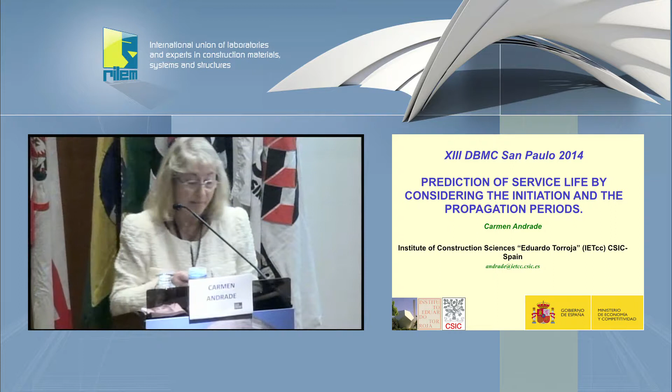My presentation tries to answer some of the questions on Vanderlei, about the prediction of the service life, which is now very popular, and I have introduced initiation and propagation periods.

The content: I will try to make a short analysis of the new trends that are included in the model code, the FIB model code.

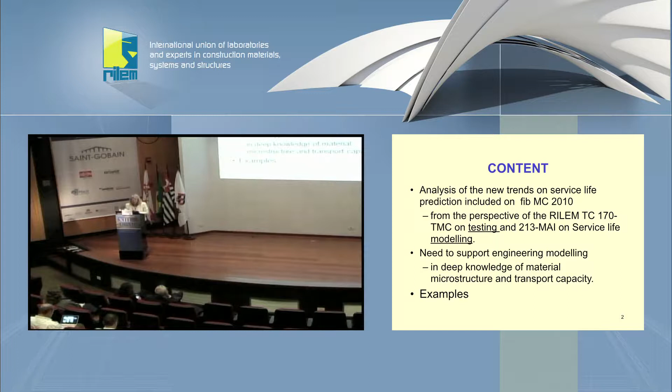This Congress also traditionally has commissions and committees of FIB participating. We now have this model code with a probabilistic design of the service life, but I would like to analyze it from the perspective of my work on the two RILEM committees that were dealing with this subject of service life, and some of the members here will recognize part of our discussions in these two RILEM committees.

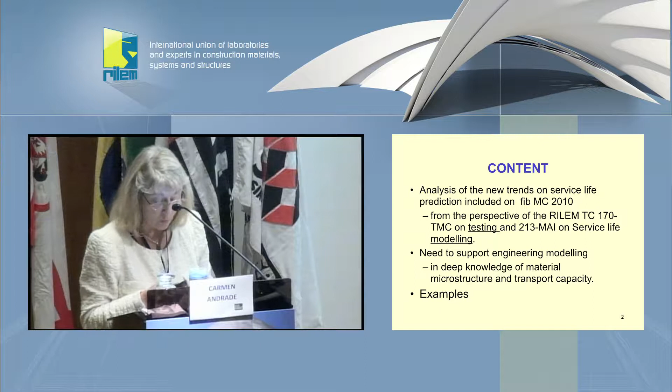The service life engineering modeling needs the support of deep knowledge of material microstructure and transport capacity, due to the lack of calibration we have, or the long-term record we have on the service life. I will try to illustrate this shortly with some examples.

The background, and I would like to recognize the discussions in these committees that I am now showing here. I mentioned already the TC on testing and modeling chloride transport into concrete, where we studied the influencing parameters on the service life prediction, and also the other where we broadened the scope, commenting on all kinds of models like multi-scale modeling or numerical models.

Also the DuraCrete project, which has been an inspiration for the model code in the part of durability, because in that project, of which I was a member, we tried to develop the framework for the reliability concepts to be introduced into durability.

But I would like to emphasize, since it's sometimes used very enthusiastically, that the examples there are fictitious, some of the numbers are invented and were tuned just to illustrate. It has an academic purpose, but some of the data are simply taken for the sake of illustration, and in that case cannot be taken as the good answer.

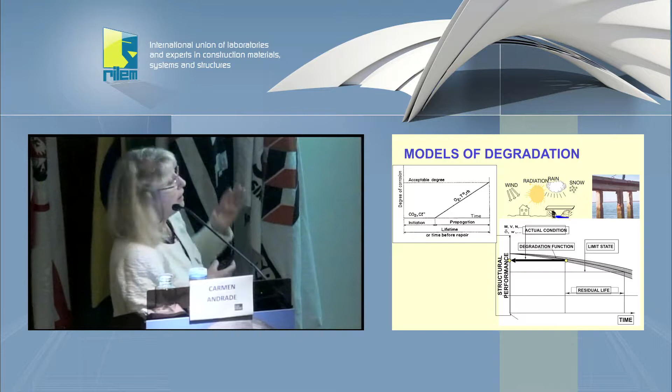Finally, more recently I am a member of Commission 5 of FIB on durability. They produced Bulletin 34, which introduced the models of DuraCrete but without enough calibration, and finally they ended up in the model code.

We have been talking in the first days about degradation functions, damage functions. Christer Sjöström the first day, and yesterday the other speakers, were illustrating well the importance of this degradation function in the total framework of the service life prediction. I have concentrated on this function.

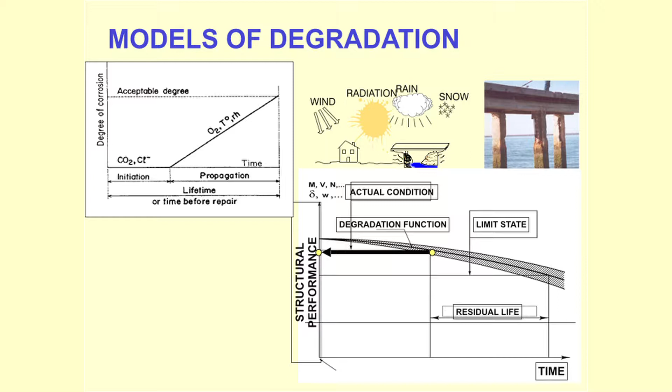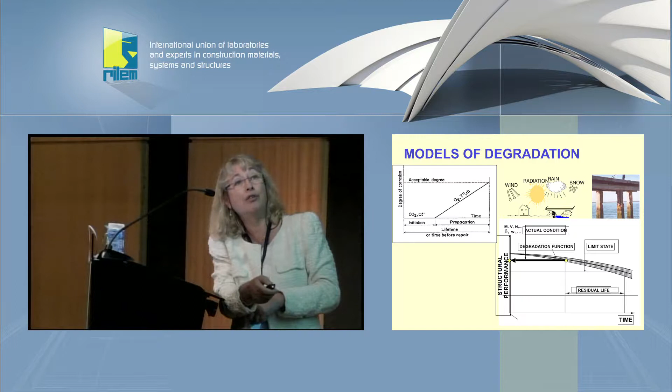They appear first in the model for the initiation or incubation of the damage, and after the degradation, the developing of the damage, we can put it in another manner as a degradation function, in which we need to define, for the sake of design, limit states in order to obtain a residual life.

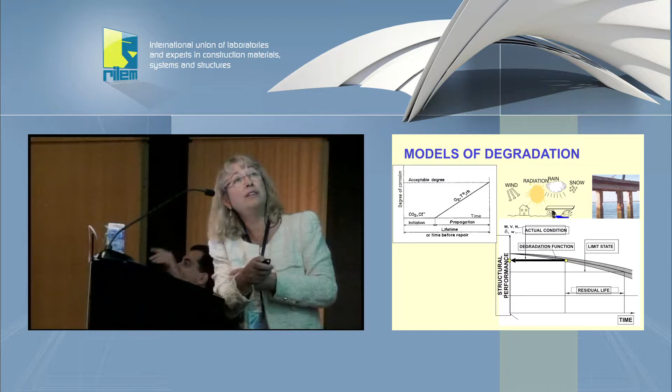What is important, as I will emphasize later and as has been illustrated by Alexander, is always the interaction with the ambient. In that case, we should have also models for the ambient, for the climate, which are now only concentrated in exposure classes.

The other aspect to take into account in this background presentation is that we are now in a trend to change standards to be performance-based, performance-based design. And we need to remember that concrete strength has been a performance property - you need to reach this.

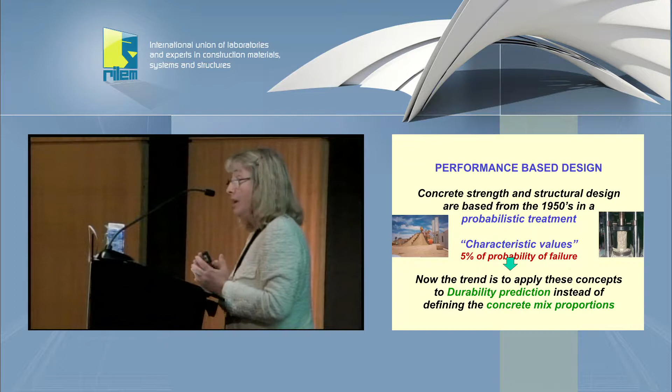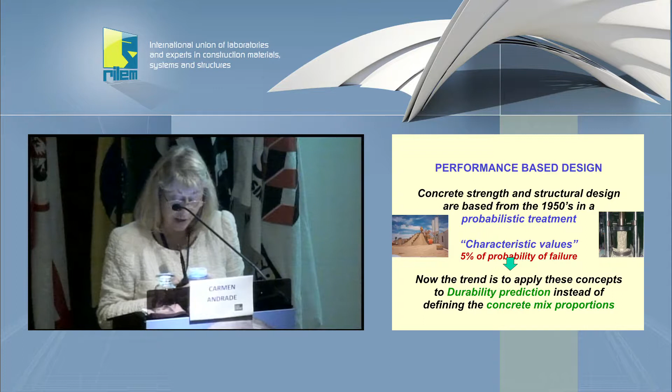In that case, we have a lot of experience, because it was introduced in the 50s, the idea to deal with this scattering of concrete strength by a probabilistic treatment. And we are talking in design about characteristic values. Now this trend is what is needed to be applied for durability prediction, and this has to be an alternative to design from concrete mix proportioning.

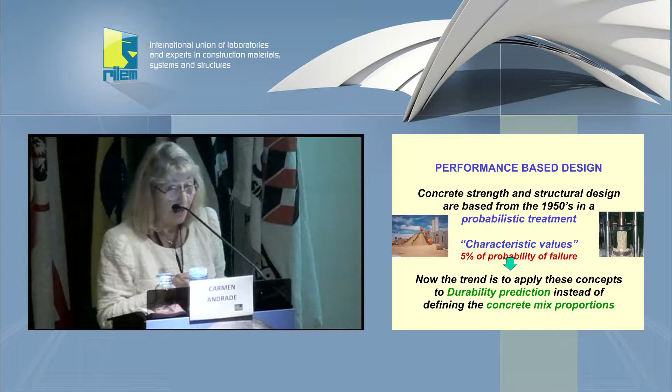But in this case, it's necessary not to forget the enormous experience and works that people working in strength and structural performance have made. And in fact, this was the driving force for the DuraCrete project.

Talking about or mentioning the model code, this is in FIB. I don't expect you to just read this, because I just copy and pasted it, but this is the scheme in the bulletin for durability design. And the most important aspect is the parallel alternative paths.

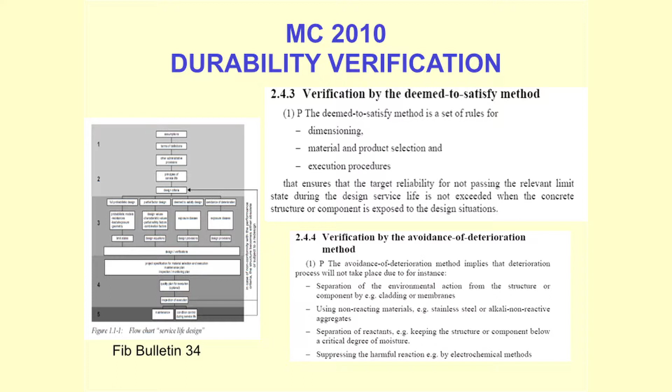They describe several alternative paths for verification, from the deemed-to-satisfy method to avoidance of deterioration, or the probabilistic treatment. Put another way, we have several possibilities for verifying durability in the future: several verification formats, the traditional one, the more modern one with service life, deterministic or probabilistic treatments, and also durability indicators.

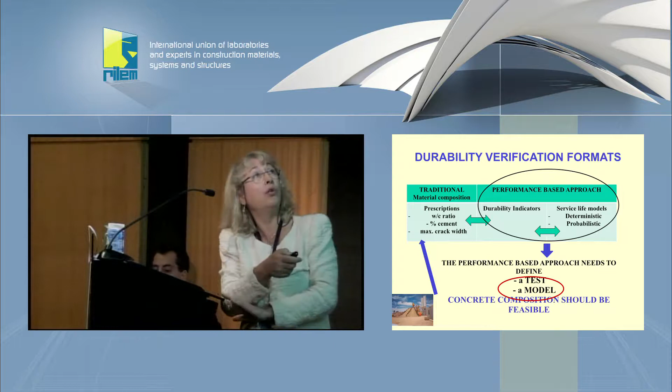I am not going to talk too much about that, but the most important thing is that they should give similar or equivalent results. We shouldn't go through one path having a completely different mix proportioning than another. Otherwise it's not correct - that's what I mean by calibration. We should be coherent and not allow too much difference. Of course, there are several types of concrete that can fulfill durability requirements, but they should be in the same range.

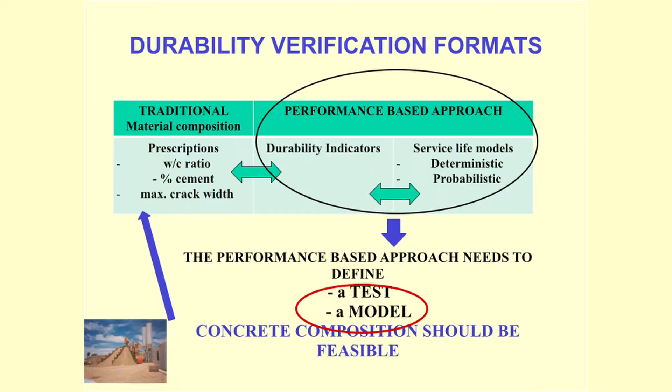And also, we always need a test to give the numbers for future performance, and a model in this case. And the concrete composition should be feasible.

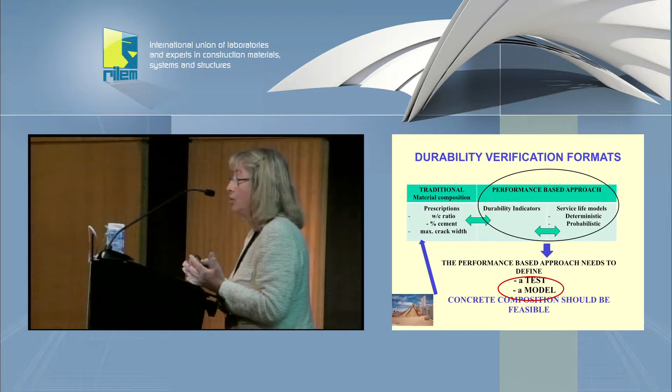I say feasible because I remember the Great Belt project, in which they were testing a lot of mixes that were really very sophisticated. And also, I will mention the Panama Canal, where they had to make about 60 mixes to find the optimum.

In that case, we should be aware of the cost of the durability performance. It's more costly, and somebody has to take that into account and consider it.

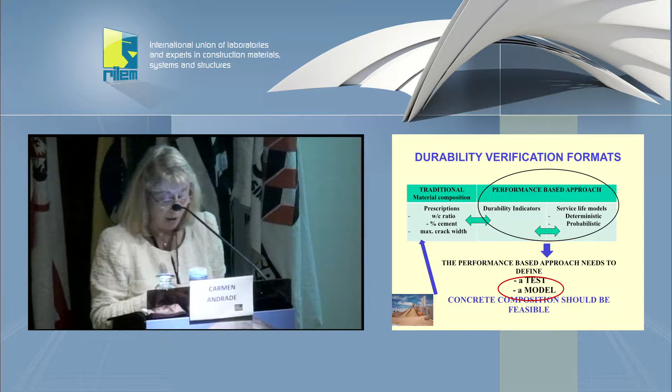About the model code - they are for the models.

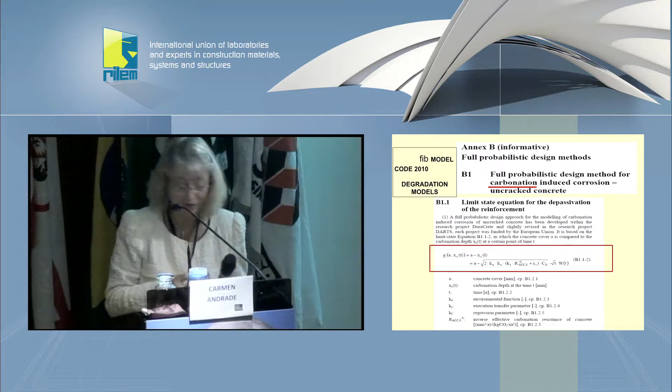In the model code, we have a degradation or damage function for carbonation. I will not illustrate this model in detail, only to say that it is too sophisticated, and this is one of the examples in which it shouldn't be taken strictly.

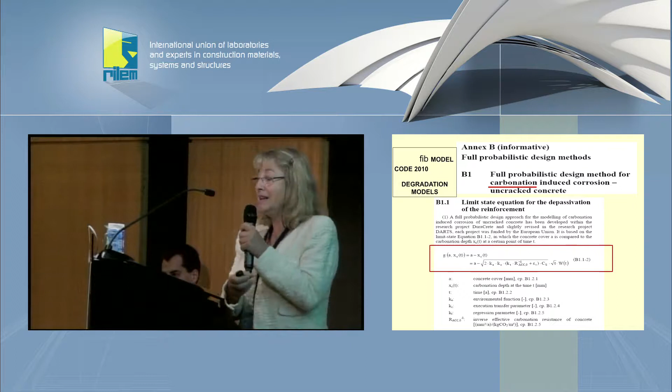The idea was conceptual when we developed this model - saying that the curing factor and the environmental factor should influence the performance, also the time of wetness - but when you try to give exact numbers, it's really complex to find the right ones. In that case, this should be taken as conceptual.

Even the term 'resistance to carbonation' was an idea during the project to be more psychologically close to the engineer by using the word resistance, but this is actually the inverse of the velocity of carbonation. In that case, it shouldn't be taken literally, each by each. It's only a conceptual model.

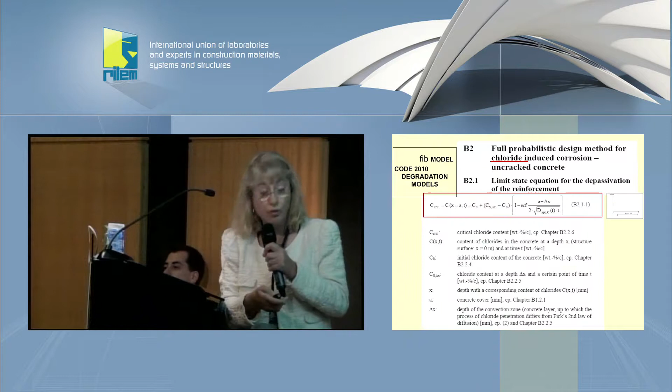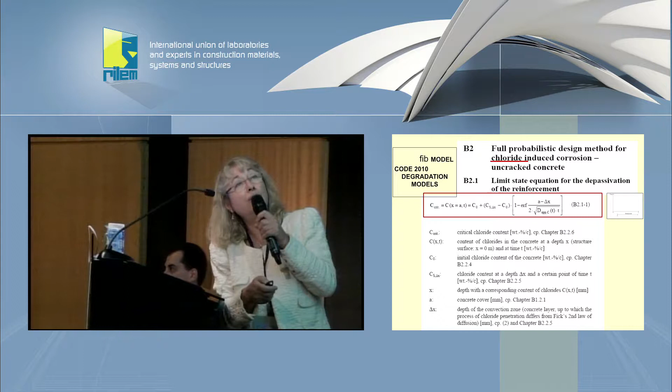Regarding chlorides, we took the error function from Fick's law. At that time we were also members of the RILEM TC, discussing the influence of the factors, and here we introduced the convection zone in order to account for the maximum when the profile has a maximum - the other parts are the same. Also, there is an aging factor not shown in this equation, and also the influence of temperature.

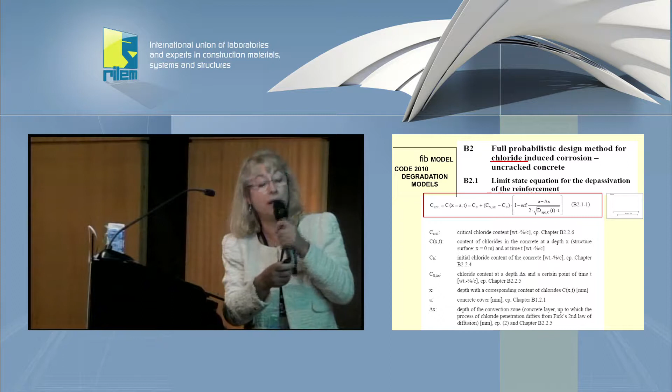I will concentrate on chlorides because it's the most common model that is used.

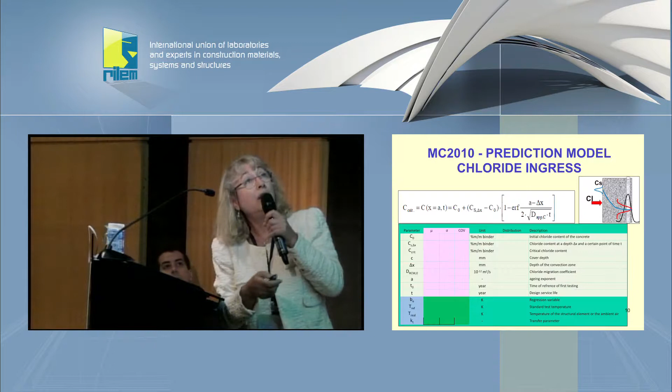About this model, we need to consider, since it was a probabilistic treatment, that we will have a distribution of the surface concentration, a distribution of the diffusion coefficient and the aging factor, perhaps the convection zone also with a distribution, and a distribution of the position of the bar.

In that case, for solving the equation in a probabilistic manner - which you can do by Monte Carlo or other tools - it's necessary to have a mean value for each of these parameters: the initial chloride content in the concrete, the surface concentration, the chloride threshold, the cover depth, the convection zone, diffusion coefficient, aging factor, and the time at which you account for the aging factor - the time of the first test and further tests.

And it's necessary to have the mean, the standard deviation, the coefficient of variation. Here, in another color, are the factors depending on the effect of temperature, which I will not talk about, but again, this is conceptual.

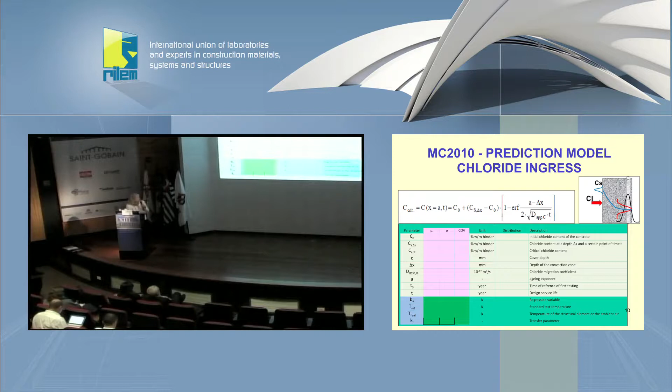Really, when you have higher temperatures, if the concrete is not saturated, the Arrhenius law cannot be used. It can only be used if you have completely saturated concrete.

This is just introduced in an Excel file for the probabilistic treatment, or in another program.

Here I present the sensitivity analysis of the effects of the different parameters in the model, assuming a chloride threshold of 0.4 - but if the initial concentration is higher, we are really decreasing the chloride threshold. In that case, without aging shown in blue or black, and with an aging factor of 0.5.

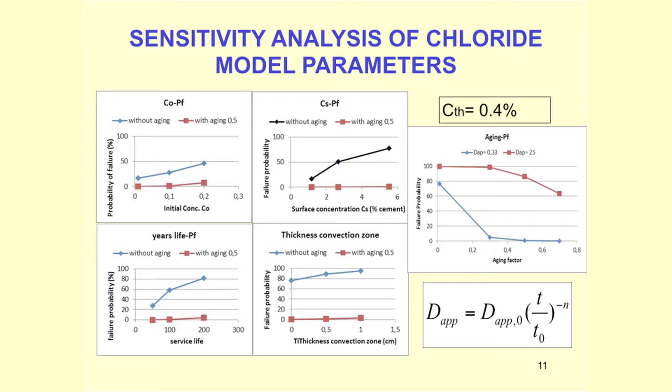There are very important differences when we just tune or shift the values. In that case, it's very necessary to say all the numbers assumed, otherwise you will have completely different probabilities of failure. With aging, that is the red one, as soon as you have a high aging factor...

In Spain, 0.5 is suggested for all cases; really the probability of failure is very, very low. That means that the service life of 50 years, which I used here, will always be fulfilled.

However, if you don't have this aging, the effect of the different parameters can be seen here comparatively, and it is very high. For instance, the surface concentration and the thickness of the convection zone are not too important. The years of life, of course, is important—50, 100, or 200—but the critical one is the aging factor.

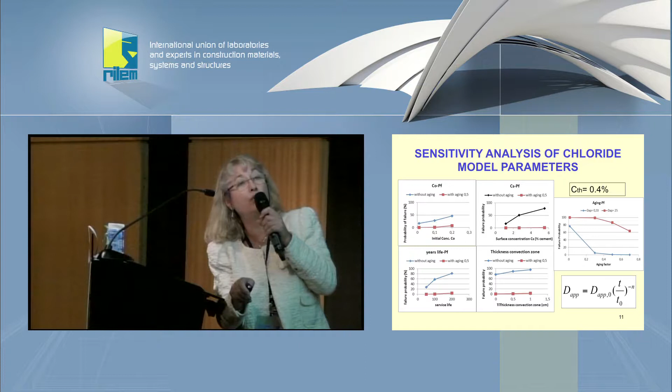As soon as, for instance, with a low diffusion coefficient, you just introduce an aging factor, the probability of failure goes from very high to almost negligible. And it's also clear here with a much higher diffusion coefficient of 25. In that case, this is the controlling parameter of this equation.

And the other point here is summarizing: the aging factor is the critical one. Also important is the reference time at which you do the first test—28 days or another time—and the duration of the application time.

I think that here is one of the answers: we should limit the application. We cannot leave the value to be applied during the whole life.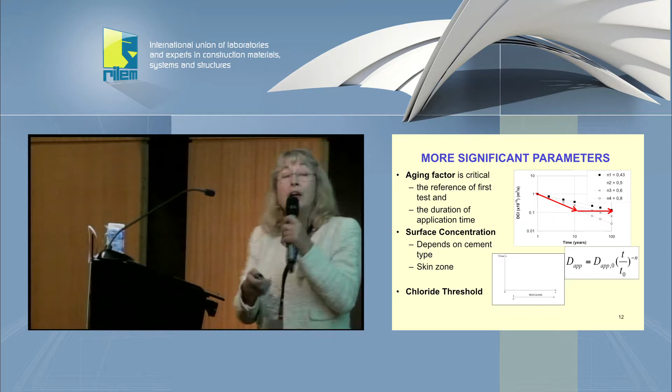First, because maybe it's not true, and second, because if we go, for instance, in this case, we have almost one order of magnitude of decrease of the diffusion coefficient with time if we let the aging factor go until the end. If we just say only 10 years, or only 5 years, or 1 year for the application, that will be much more conservative—that is my recommendation—or at least less risky because of the uncertainties we have and of how this will evolve.

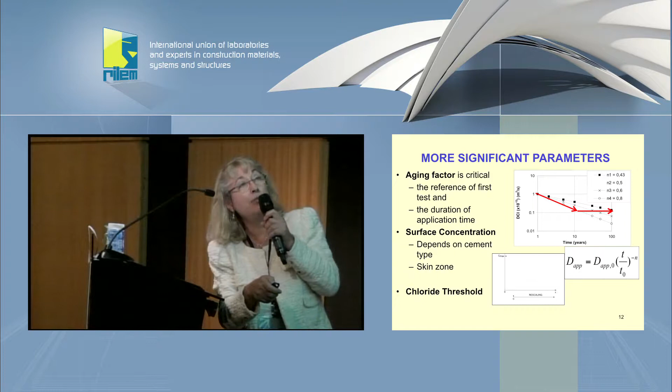About the surface concentration, what is very important is the consideration that the surface concentration is not the extrapolation of this maximum, because this is a virtual concentration, it is not there. The real concentration—RILEM TC on testing was working on that in order to say that the maximum is what has to be taken as the driving force, as the surface concentration was incorporated into the Duracrete project.

In that case, it has to be there, and just add this skin zone. But the thickness is important.

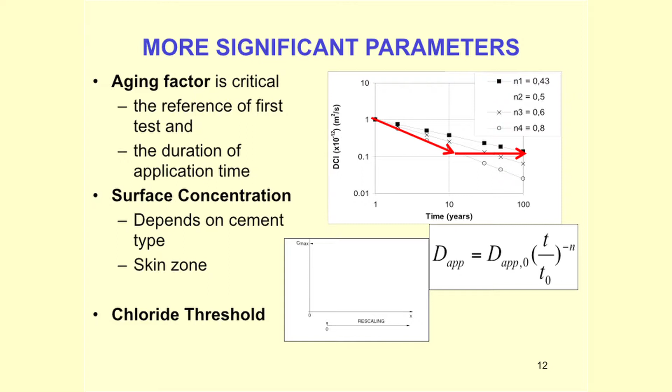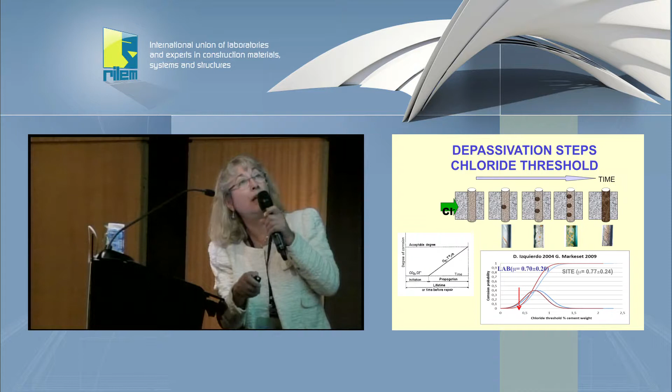And of course, about the chloride threshold, it is also important, as this is one of the discussions—which is the chloride threshold. First, we should imagine, as I have presented previously, the depassivation not as just a point, but as a continuous evolution in which the area affected—if it is carbonation—will be the external part; the area affected around the perimeter will increase with time. In that case, the amount of damage will increase with time.

In that case, the depassivation is like a period of time, and the chloride threshold is also a kind of statistical distribution. I put here in red the distribution we found in mortar specimens in the lab, and this was found by Markeset in real bridges in Norway, and they are so close that we can say that this is a general distribution for bridges, at least in the aerial part.

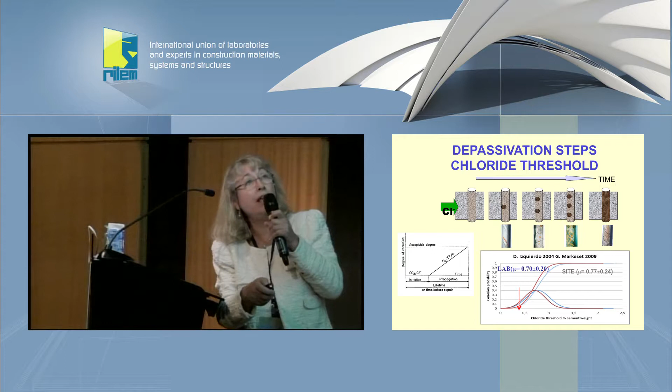And we see that the 0.4 that we are typically using gives about 10% probability of failure. In that case, taking 0.4 as the usual value is conservative, is correct, and is to say that it will be about 10% probability of depassivation in the time we are considering.

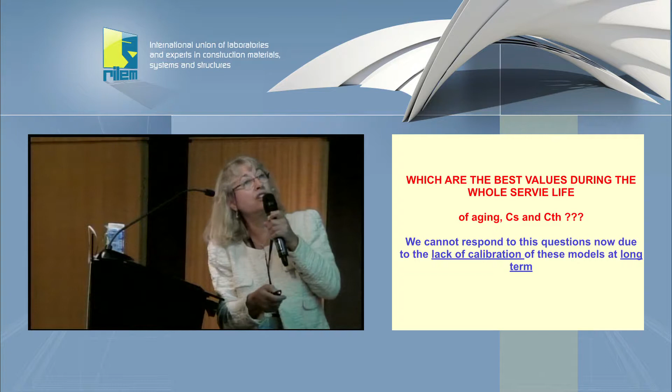Which are then the best values during the whole working life for aging, surface concentration, and chloride threshold? Really, we cannot respond to this question now due to the lack of calibration of these models at long term, and this is what we need to assume. We don't have more record than 20 or 30 years of following specimens and structures, mainly for the aging—how they have evolved in the diffusion coefficient.

However, we need to apply what we have now in real works, and this is the typical challenge of the engineers. We need to give an answer—we cannot wait 20 years to give an answer.

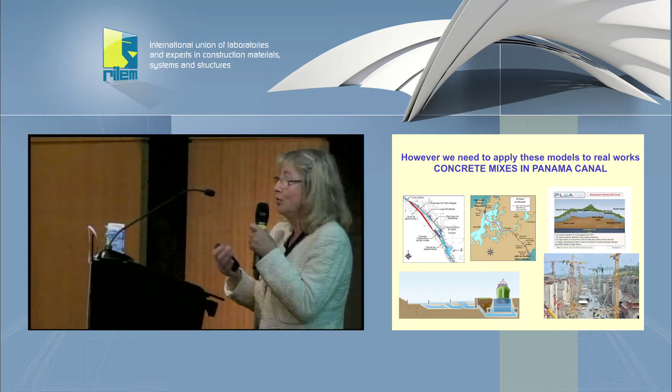Very briefly, to use this for illustration, the new locks are being built in parallel to the old ones. They are building them at the two entrances of the two oceans, one on each side. The profile of the country is in this manner.

They need locks to go up and down because they have artificial lakes facilitating navigation in the middle. The new locks have a difference: they have pools aside in order to recover and recycle the water, and to spend less fresh water from the lakes.

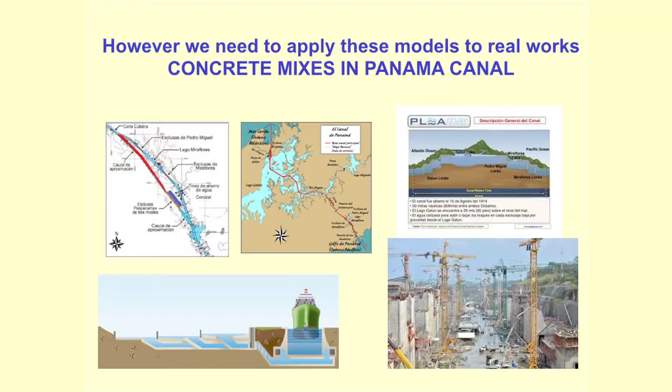As the capacity is much higher, they would just exhaust the hydraulic sources if they kept using and delivering water to the oceans. So they did that instead. This is a view of the works going on.

We took a core from the old canal, which is now 100 years old. This year they are celebrating the centenary. We were analyzing and studying precisely how this has aged. I presented a paper at the Aging Congress of Klaas van Breugel about these profiles.

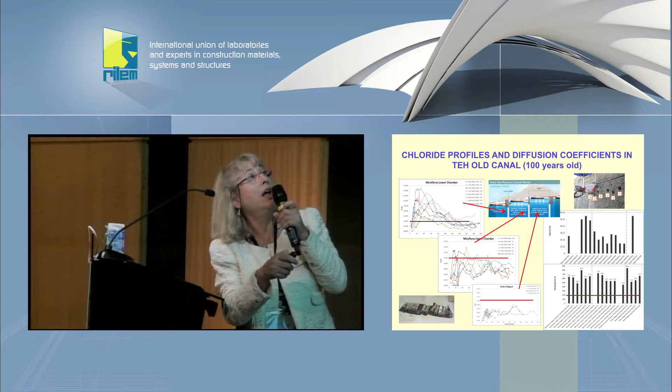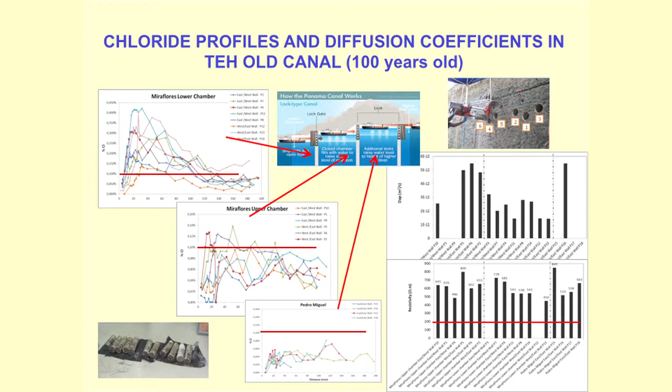We have a scatter in the surface concentration and the maximum. The maximum also has different convection zones, and it's clear that in the locks near the sea we have much higher concentration of chlorides. We are realizing these amounts are similar to what we see in many other cases, and in the intermediate zone there's a much lower amount of chlorides, and of course in the fresh water of the lake there are no chlorides at all.

We were analyzing the diffusion coefficient and the surface concentration in order to make a statistical analysis. I invite all of you related to these structures to try to collect data, so we can have a statistical analysis of all structures to fill the gap we have in the knowledge.

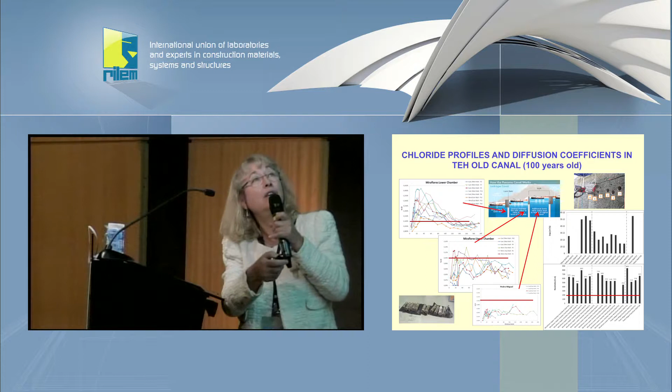We didn't do any test on this concrete 100 years ago, of course. In that case, we cannot relate the short time test to these values, but at least we can make some projection. Also, we lack good models for the ambient conditions, which is important.

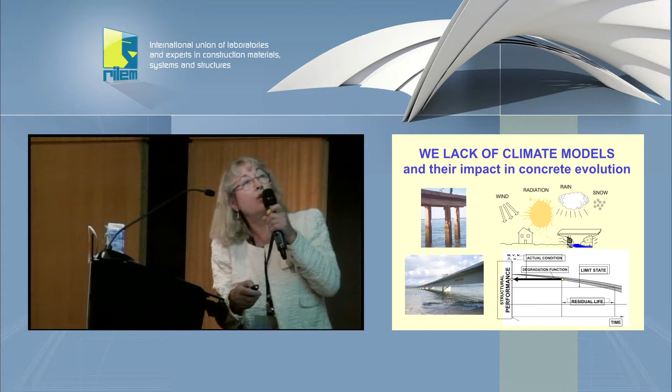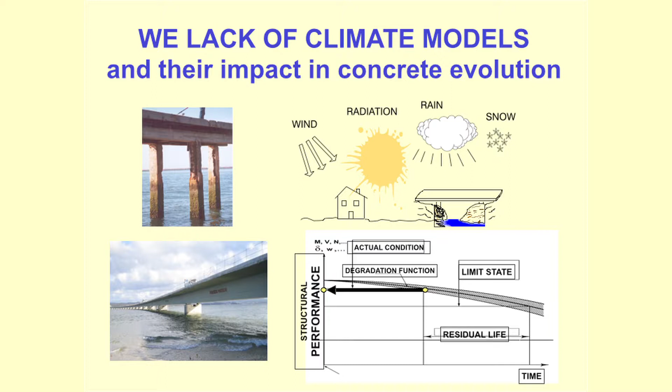We use exposure classes: tidal, aerial and submerged, but we don't have models. I would like to mention the very good work of Gibson Meira in Brazil, who in his thesis developed a model for the deposition of chlorides depending on the distance to the seaside, and he continues working on the effect of winds.

There are now other people working on that. This is a first attempt, but we need more work in this area.

Finally, to finish this part, how do we predict with this uncertainty? Being aware of the model limitations is very important to transmit to the engineers. We shouldn't be too triumphant saying we have a model, we have a code, and now everything is solved. We need to transmit the limitations as well.

They also need to understand the physics of chloride ingress and the evolution of concrete microstructure with age. Because if they are not able to understand at least a minimum—and we were talking the other day about the importance of education for engineers—it's better that they use the traditional manner. Because the new models are very attractive, but they shouldn't just go to that without understanding.

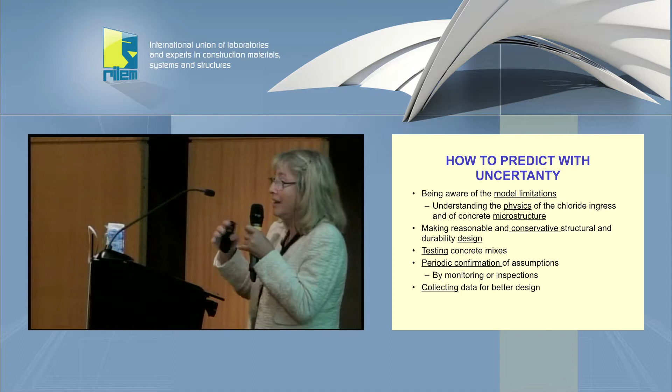I say that because I'm finding that people are trying to make, as we had in the Panama Canal, a performance-based specification without any knowledge behind it. That makes a lot of problems with the builder. And if nobody understands the physics, afterward it's very difficult to convince the authorities or the owners that they were wrong in some parts of the specification.

The other option is being conservative, making a reasonable and conservative structural durability design. You cannot make a very strange or very slender structure if you are in a very aggressive environment. It's much better to be conservative—despite maybe the aesthetics not being as good—because otherwise the maintenance and problems may come too early.

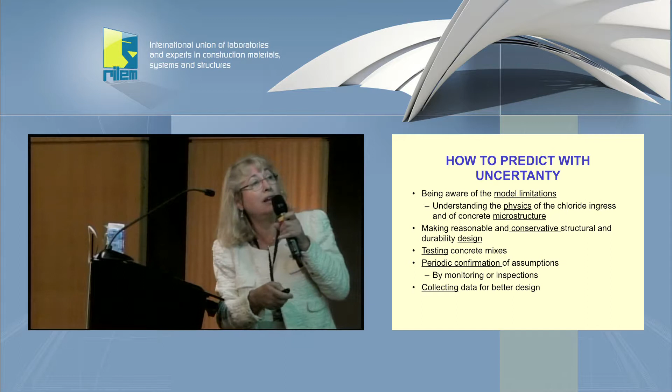Testing concrete mixes is necessary to test for durability, along with periodic confirmation of the assumptions by monitoring or inspection, just to be sure things are going as assumed during the initial time, and collecting that data for better design.

Regarding test types, I would like to express that I am completely in favor of natural diffusion tests when the responsibility of the structure is high.

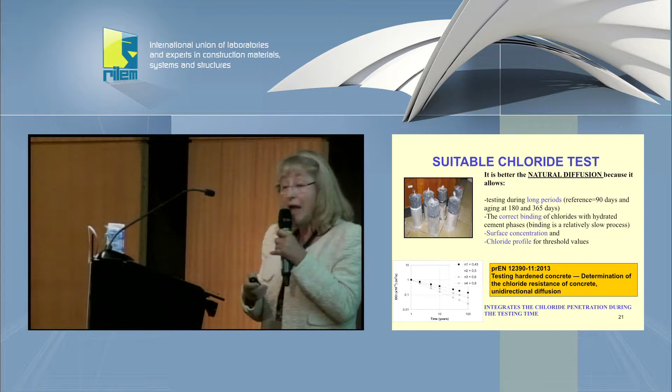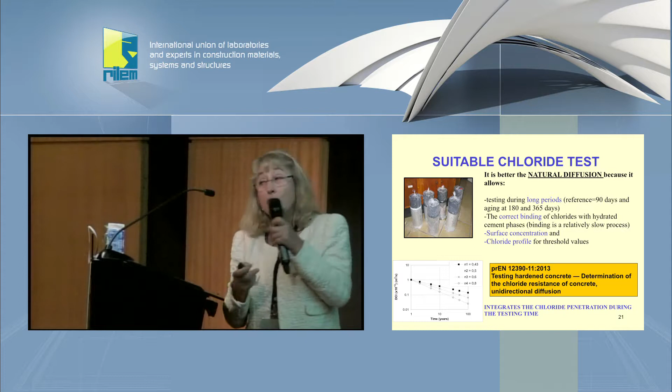I find very many advantages, and in fact at European level this is the test that has been standardized as reference. You can use others, but not as reference. Why? It's the best we have, mainly because it's able to have the salt water in contact with the concrete continuously. If we need to study aging, we need maybe even one year long periods of contact, and it's necessary to have the salt water in contact permanently. It is an integral test in the sense that it gives the performance, and the chloride has been acting continuously on the concrete.

The concrete ages in presence of the salt water, and this also allows a correct binding of chlorides. It is possible to have the surface concentration from the chloride profile, and also the threshold value. I think that this is the most suitable test for testing the mixes.

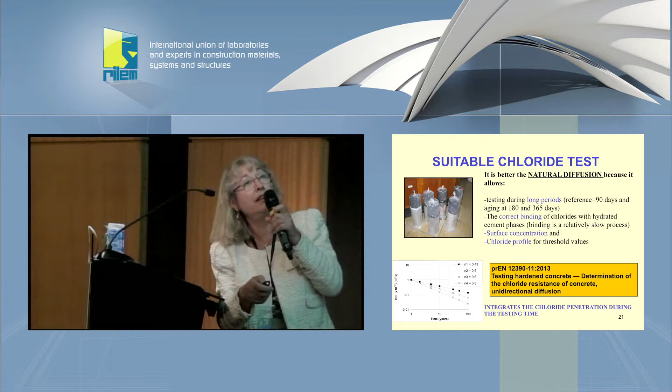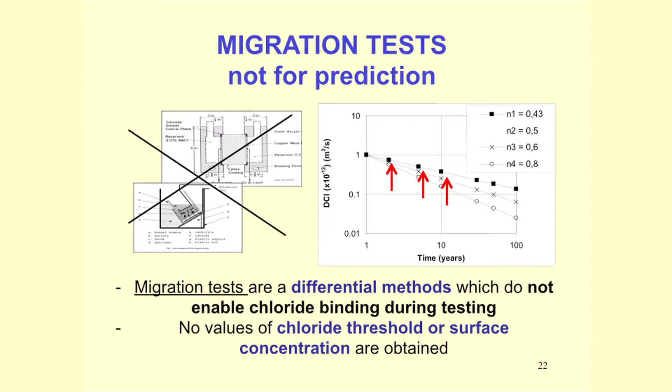In spite that it takes a minimum of 90 days, or even longer for aging, I am against using the accelerated tests, whatever they are, if we go to the aging factor, because in this case the concrete ages out of the salt solution. You just leave the concrete, and after a certain time you measure, but if it needs to be in contact with the salt, you cannot use these methods.

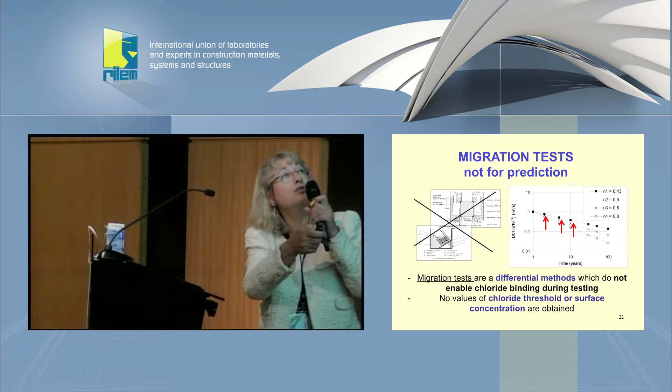Well, maybe this works for the coulombs test, but you are removing the chlorides that have been entering in contact with the salt water. In that case, you cannot use these methods for aging, and aging is the controlling parameter. This is a differential method that does not enable chloride binding during the short time of the testing, and no values of chloride threshold are given, nor is the surface concentration obtained.

I am in favor, as several of you know, of the resistivity method, because if you like a really quick, very rapid method, resistivity is non-destructive, is able to give the same information as the other methods, and you can leave the concrete inside the salt solution and follow the resistivity after several times in contact with the salt solution.

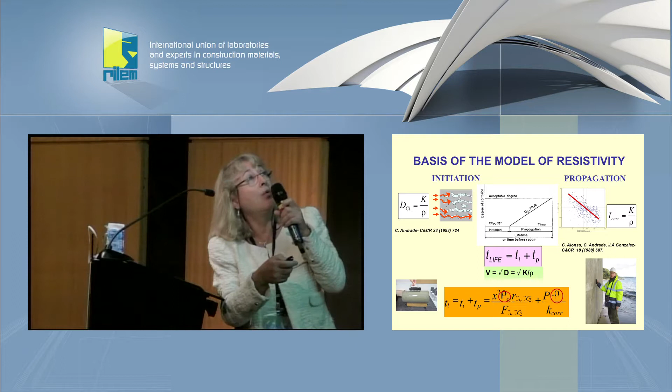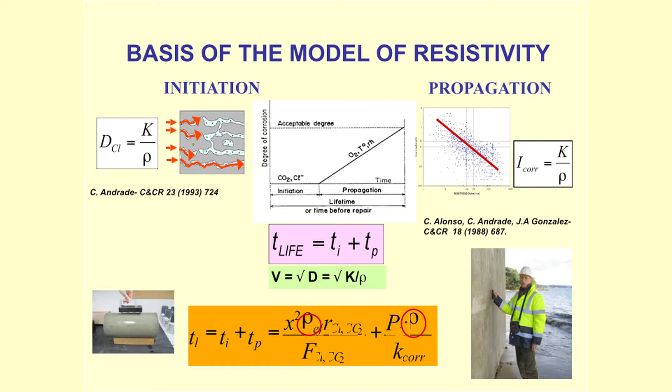We have developed a model for the initiation period based on the resistivity and its relation with the diffusivity, and also the resistivity's relation with the corrosion rate. Using a square root law, it's possible to have a service life model based on the resistivity measured at 28 days, and for aging it's possible to leave the concrete in contact with the salt water and get the aging factor correctly.

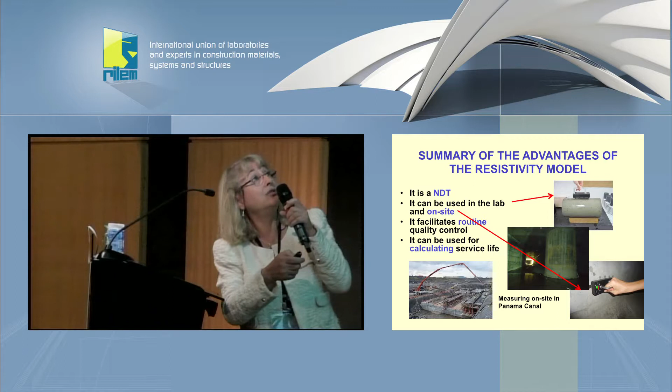It's a non-destructive method. It can be used in the lab and on-site. We have used it to verify the resistivity in the Panama Canal in order to know how it has been fulfilled. It facilitates routine quality control and can be used for calculating service life.

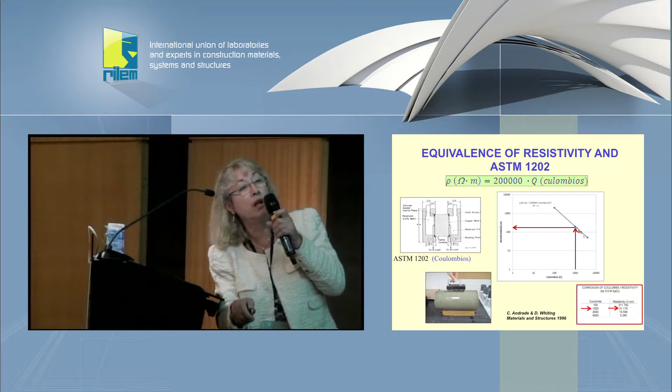And it also has a correlation with the ASTM test, the coulombs, where about 200 ohm-meters is equivalent to 1,000 coulombs. This was published with David Whiting in '96, this equivalence.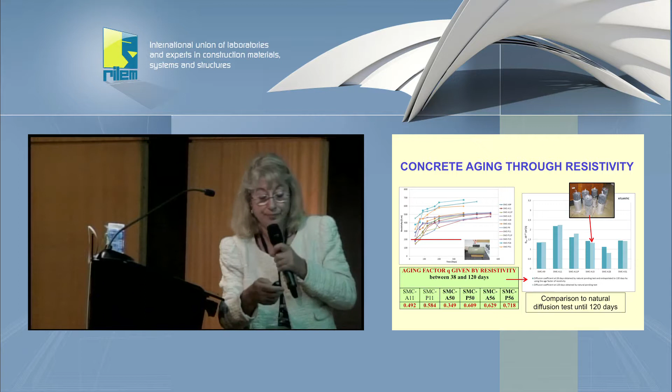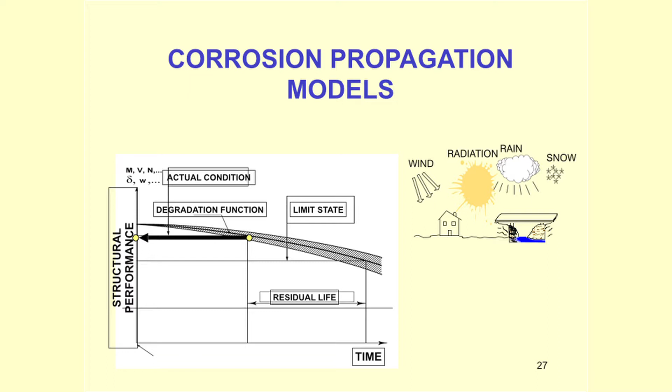Well, I go now to end with the propagation models. Again, we need to try to develop a damage model for the propagation of the corrosion, also taking into account the effect of the environment. The model was published some time ago and is very simple.

The amount of corrosion reached after a certain time depends on the velocity of corrosion, the corrosion rate. Millimeters per year of penetration of corrosion, times the years, gives the millimeters after that time. This is the most simple one, just measuring the decrease in the diameter.

Also, it's possible to measure the pitting factor, which we introduce as alpha, and apply it to the diameter: the initial diameter minus the penetration at a certain age, multiplied by the factor we suggest for pitting, for the most deep pit, will give us the residual diameter after a certain time.

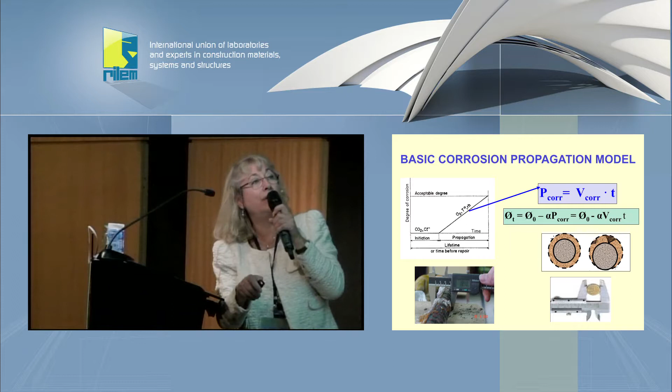Is that happening in reality? This can be predicted in some manner, not only saying that this is the simple model.

Well, yes, the corrosion is dependent on the amount of liquid water in the concrete, that is the degree of saturation or the volumetric fraction of water. If we are able to measure the amount of water remaining in the concrete depending on the ambient conditions, it will be possible to obtain the degree of saturation, and from the degree of saturation we can derive finally the corrosion, as I will show.

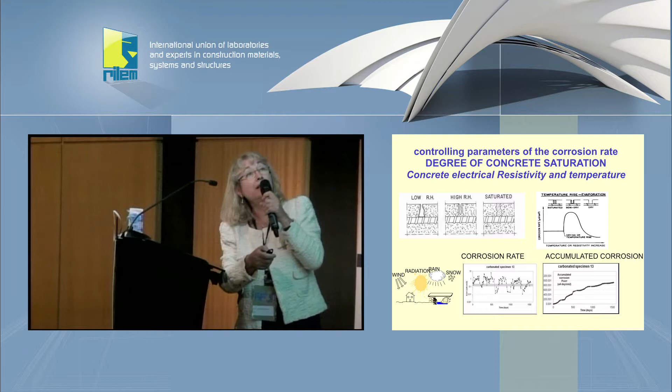Here I would like to illustrate the effect of temperature that I was mentioning yesterday. In concrete, when the temperature rises, the water inside evaporates. This is a type of curve that I took from atmospheric corrosion. It happens exactly the same as when you have steel in the open atmosphere. At the beginning, as it is wet, you have a layer of water on the steel and the corrosion rate increases. But as soon as the water evaporates due to the rise in temperature, the corrosion rate decreases.

This is why it's complex to introduce the effect of temperature in the corrosion rate, because it has an opposite effect depending on the length of time and the increase in temperature. Conceptually, if it is dry, there is no corrosion. This is what happens in the south of Europe, in my country, because we have long dry periods. In spite of high temperatures, we have less corrosion than the Nordic people, who have much more time of wetness because the water remains inside the pores for a longer time.

Just looking at the effect of the ambient conditions, we did a lot of work on this, and the corrosion rate changes, of course, depending on rain events, temperature, and so on. But if we just plot that as accumulated corrosion, that is the amount of loss in diameter with time, it is not so dispersed. It is progressive, of course, the loss in section, and looking at the events of summer and winter, it's possible to see more or less what is in the conceptual model of a constant corrosion rate.

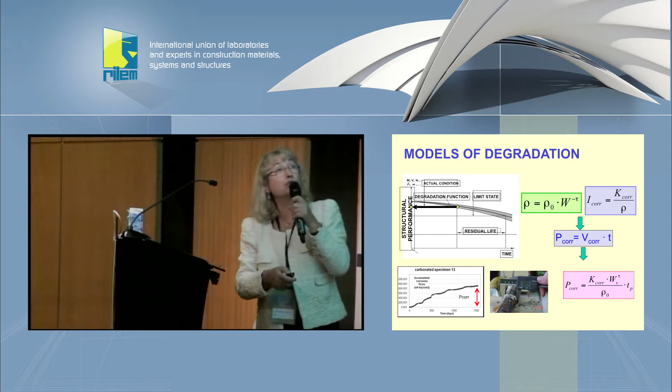This is the Pcorr that we were discussing at the end. At each age, you collect a loss in corrosion that depends on the corrosion rate, but as the annual cycles of climate repeat, that is cyclical and continuous.

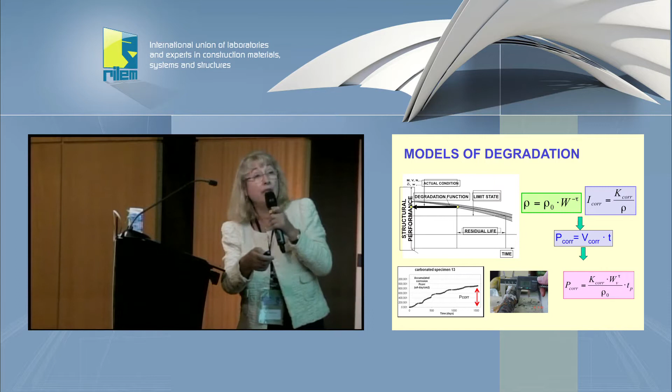Finally, using a modified version of Archie's law, which has the degree of saturation of the volumetric water powered by a factor that can be 2 as an average, and using the model that we developed of the relation of the corrosion rate with resistivity, we may have this for the prediction: a constant, a fixed number, the volumetric fraction of water powered to 2, for instance, and the resistivity of the pore solution, which also doesn't change too much over the time of the corrosion acting. This is the model based on the degree of saturation of the volumetric water.

Finally, I finish with the acceptable limit state for the probability of corrosion, which is another question addressed. In that case, it's necessary to make the structural calculation. You need to verify the serviceability limit state, the ultimate limit state, with structural engineers.

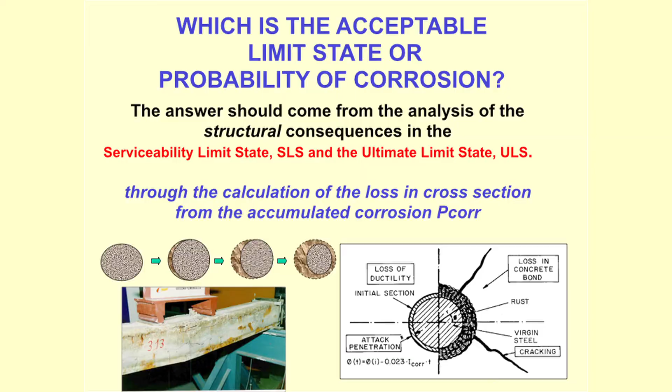They need to work with you, at least with me, since I am not a structural engineer, in order to calculate the loss in cross-section from the accumulated corrosion. We link this loss in cross-section with the four main consequences of corrosion on structural performance: the loss of diameter, the loss of ductility - I will explain how important this one is - the loss in bond, and the cracking. All these effects have to be analyzed independently, and they affect the full structural performance of the corroded elements.

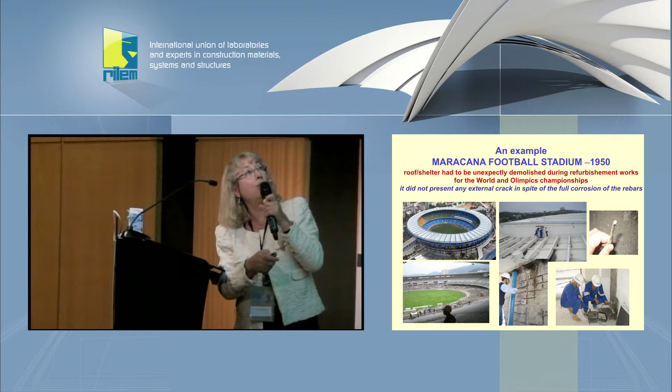I finish with the Maracanã Stadium, being in Brazil and having had the World Cup. Here I need to talk about Professor Enio Pazini, well known here, though not at this Congress, Professor at Goiás, who correctly diagnosed what happened at the Maracanã marquee. It was not showing any sign of corrosion apparently, but as soon as you touched it with a hammer, the cover was falling down, and inside it showed that almost all the rebars were corroding.

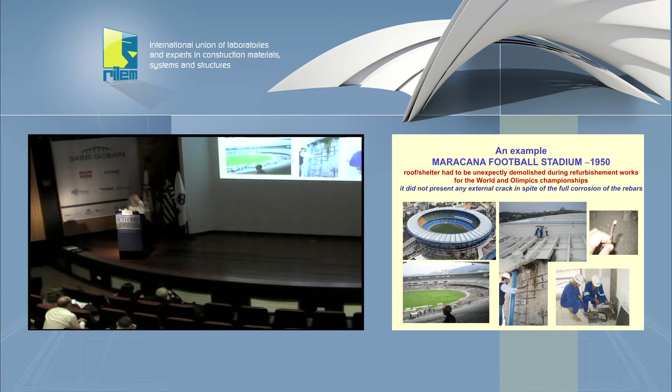What did Ennio do? He tried to make a detailed diagnosis using ultrasounds and a corrosion rate meter, and he detected very weak zones non-destructively and also high corrosion rates. That's when he suspected the problem was much bigger. We also realized that the steel wasn't only corroding and losing section, but you could break the steel with your hands. This is one we broke, because it had been embrittled, and corrosion can embrittle steel when losses are higher than 25%. This is a hidden problem we shouldn't forget when repairing structures.

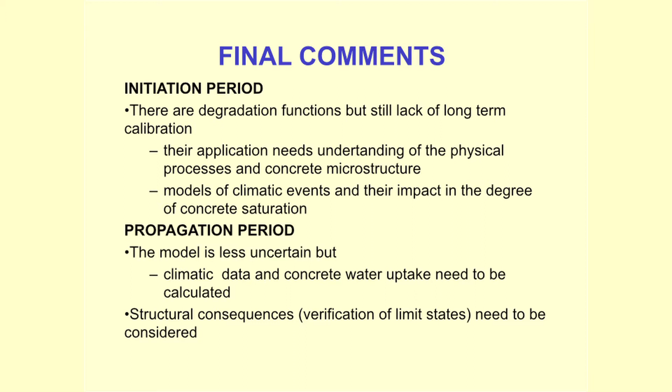Final comments for the initiation period: there are degradation functions, but there's still a lack of long-term calibration. We have them, but we need to be aware of that. Application requires understanding of the physical process, and concrete microstructure should be considered by people who are aware of that. Models of climatic events and their impact on the degree of concrete saturation are needed, so we know more about how the degree of saturation depends on different climates.

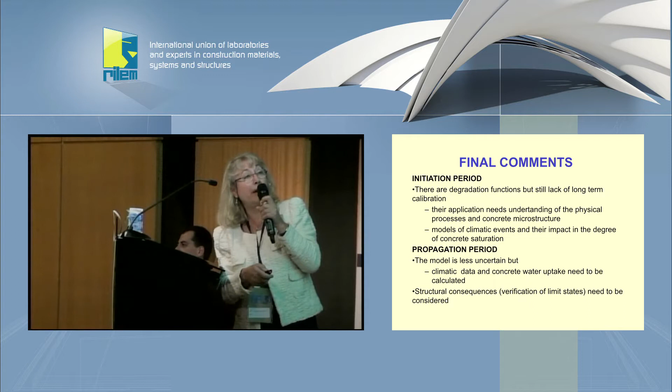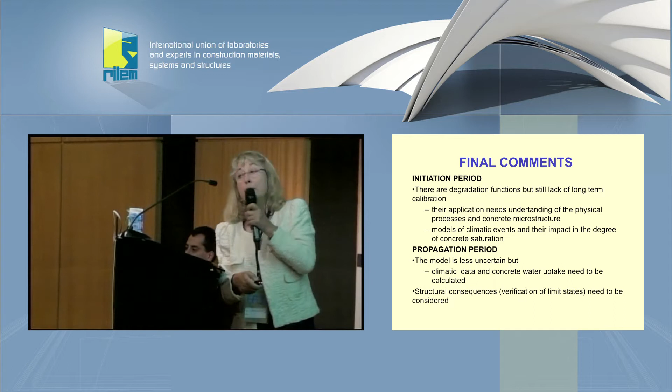About the propagation period, the model is less uncertain and has been studied much longer, with aging considered. We know how steel corrodes and how different structural consequences are affected, but we also need climatic data and concrete water uptake for the prediction, because we need the degree of saturation. About structural consequences, verification of limit states needs much more work. There is an expansion of interest now in how corroded structures perform, and it's very important to collect data and continue this work.

Finally, this is the Maracanã Stadium. I received a book saying that Maracanã is built for the 21st century. I hope it reaches a very long life too, for this new, in my opinion more beautiful, stadium. Thank you.